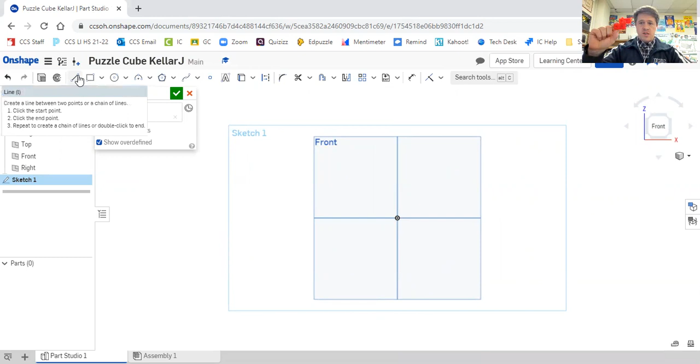I'm going to start a new sketch on the front plane and outline my Z piece. I like to always have my parts connected at the origin in one corner, so I'm going to start there.

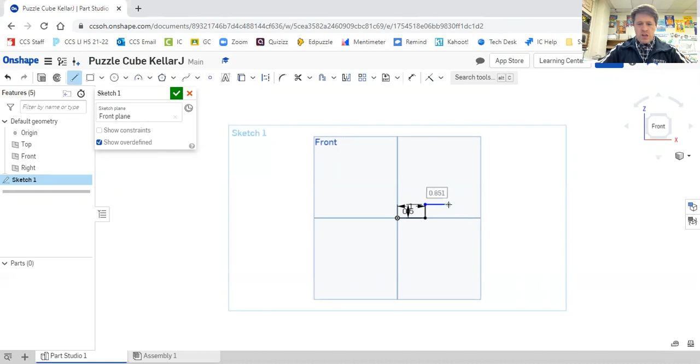This bottom edge is 1 inch because there are 2 cubes, so I'm going to make a line that's 1 inch. Then this part goes up a half inch. Oh, it didn't let me set the dimension, so I'll have to fix that later. I can type, since it's got a box around it, so I'll type in 0.5. And then I'm just going to finish drawing without dimensioning, and you'll see why shortly.

There and there. Okay, so now I've got my rough shape here.

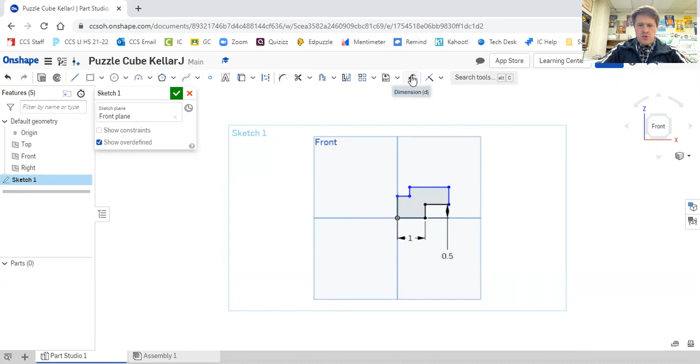But the rest of this needs dimensions, so I can use my dimension tool up here to add dimensions. I need to get this distance to be 0.5. Then this long part on the top should be 1 inch. Click, place, 1 inch. Then I zoom in, this part here should be a half inch, so 0.5. And this part here is automatically constrained, that's a half inch. But I do need this part here to also be a half inch, 0.5.

Now you see all the lines are black and the interior is a little dark, which means it's constrained completely. And I can finish my sketch.

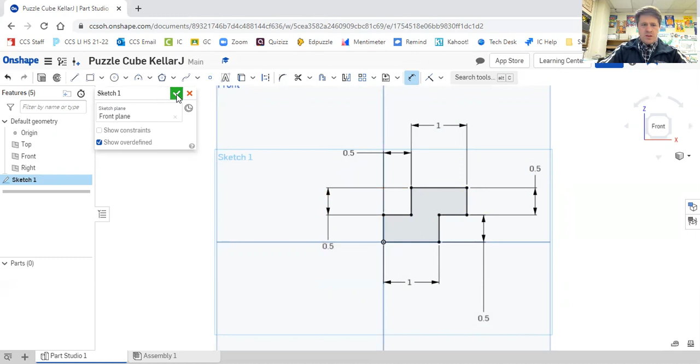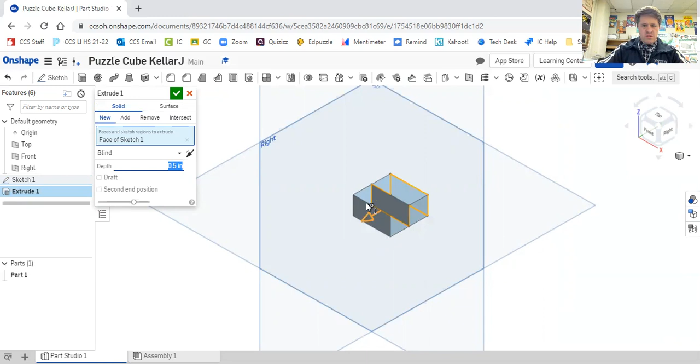Now I need to extrude this. So click extrude, select the sketch that I want to extrude, which is this one, and I want my depth to be a half inch. There we go. And check. So now there's my Z piece.

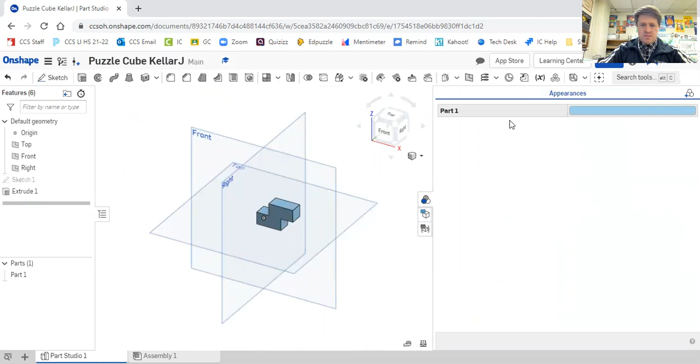You can see it in the front there. And I'm going to make it red to match the color of this. So I go over here to my appearance panel, the 3 little circles on the right side, click on that. Then in the parts browser, select part 1 so it selects all the faces, and then double click part 1 and select the red. See, all the sides change, check. And I can close my appearance panel.

Finally, I want to change the name from Part Studio 1 to red. So come down here to the tab where it says Part Studio 1, right click on it, rename, and say red. So there's my red piece.

Now I'm ready to build a new piece. So I click in the lower left corner, insert new element, this plus sign, and I'm going to create a new part studio. See, there's a new tab with a new part studio. I can start building a new part.

All right, so my new part is going to be this guy. Okay, it looks kind of different here, but if you notice, this is just the Z part with a square added onto it.

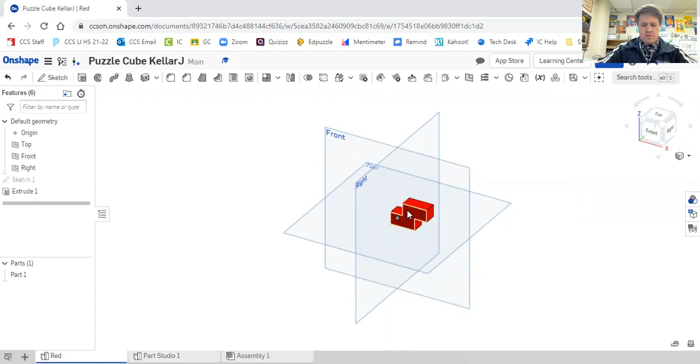Okay, right there. So it's just got a cube added onto the front. I can build it the exact same way and then add a cube onto the front. I'm going to do that with my original red piece here, just adding a cube right onto the front.

Click on Sketch. And now, instead of selecting one of these origin planes, I'm going to select the front face of my Z piece right here. And then I'm going to draw right there.

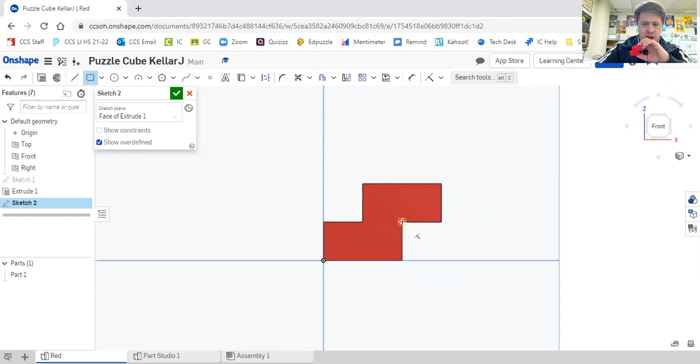Notice this cube is a square from this corner to the upper corner. So I'm going to do a little rectangle and snap it to that corner. See the red, the yellow square? That means it's connected to that corner. And I want it to connect to the upper corner here, another yellow square. Click, and notice the dimensions are constrained automatically to be a half inch each.

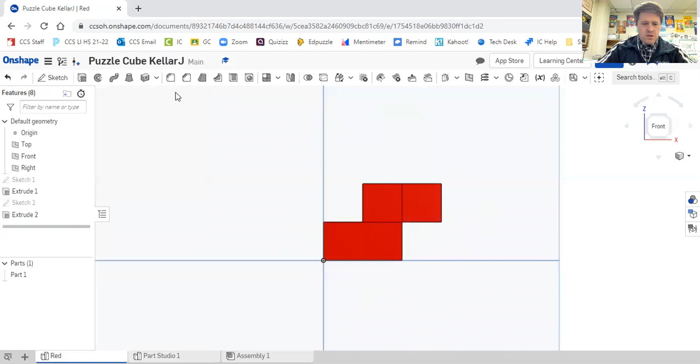So there's my part, and then I need to extrude that. I'm going to select that shape and extrude it out a half inch, one cube's worth. And boom, there is my part. If I look at it from that side, you can see it sticking out.

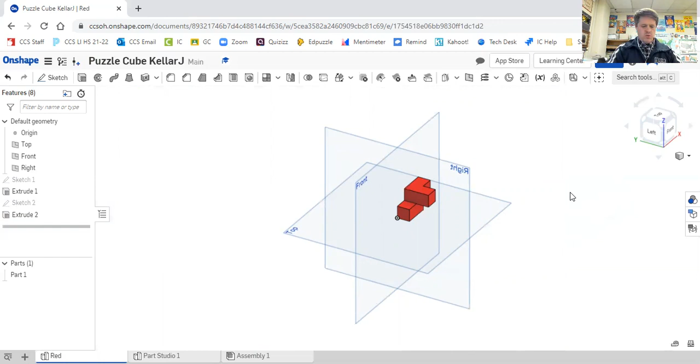Okay, all right. Now one more part we're going to build. This is going to be a new one. So I'm going to switch over here to my part studio, and I want to build this part.

Now, depending on the way you look at it, you could set it like this, or you could set it like that, so it's resting on the big part. I'm going to draw it like that so we can see. So how would I draw this?

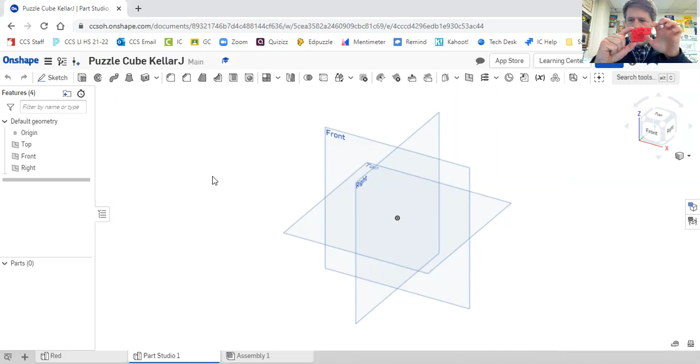Well, a couple ways. You could, if you notice, it's a Z piece with the bottom part sticking out a little bit further. Or if you look from the top view, it looks like a square with something sticking off of it. So that's how I'm going to draw this one.

So I'm going to start my new sketch, and I'm going to select the top view. And I'm going to draw my square. This is a one inch square. So I'm going to start here at the origin, see the yellow square, click, make that one inch, enter, one inch, enter. Okay, finish that and extrude that a half inch.

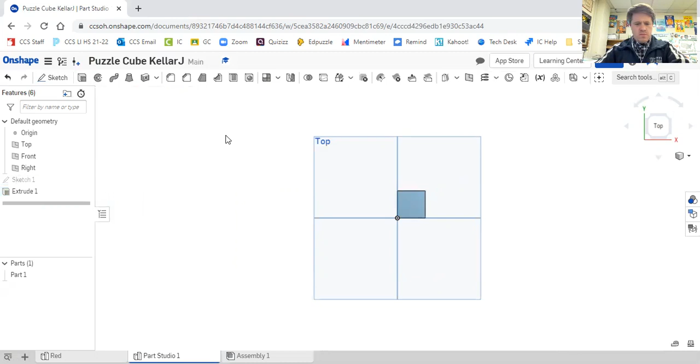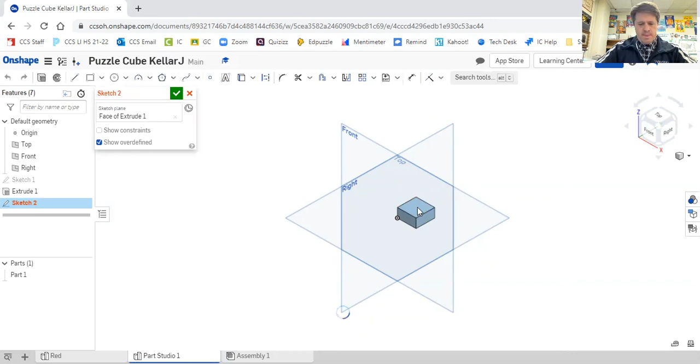So there is my part from the top, and then I just need to draw this rectangle that's sticking off of it. So I'm going to start a new sketch and click on the top of my base there. Now I'm going to just get zoomed in here a little bit. I'm going to draw a new rectangle starting from the midpoint here.

Make sure it's attached to this midpoint here. Oops, no. There we go—midpoint, and then stretch it off. And that part should be one inch wide there. So I'm going to type in 1, enter.

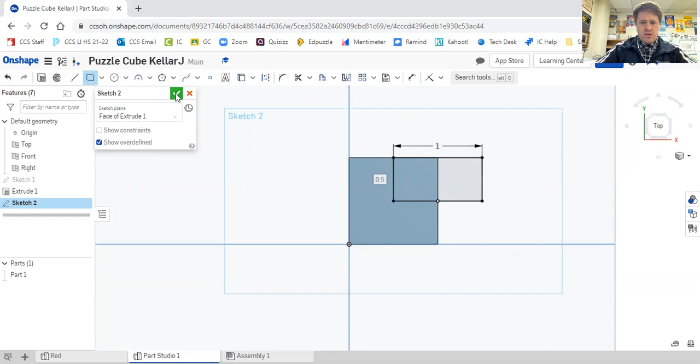And now I want to extrude that up a half inch. So I'm going to select the part that's over and make sure I'm not selecting new. I want to add, I want to add to this and here. And I want it to extrude a half inch.

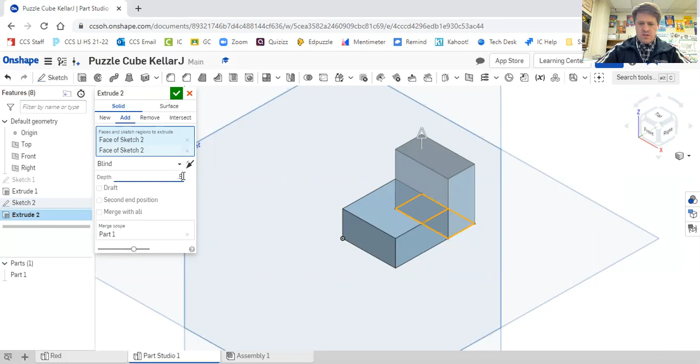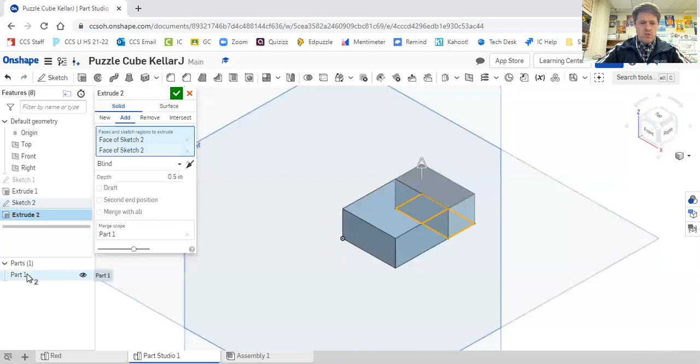If I did new, it would make a brand new part 2. I don't want two parts on the same piece—I want it all to be one part. So I want it to add, and it's merging with part 1, so it's going to add to the already existing part 1. And boom, there is the part that's there.

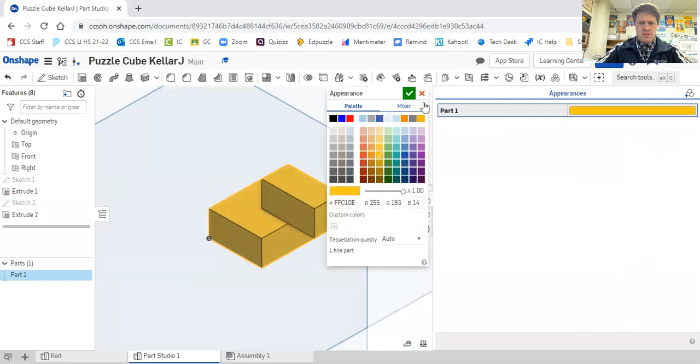And I'm going to make this yellow. So select part 1, double click there, and I'm going to select—I like this yellow—and check. And I'm going to rename that part studio to yellow.

And that is a little primer on how to make puzzle cube parts in Onshape with multiple extrusions. You can select different sides, draw a sketch on the side, and extrude it however much you need it to be.